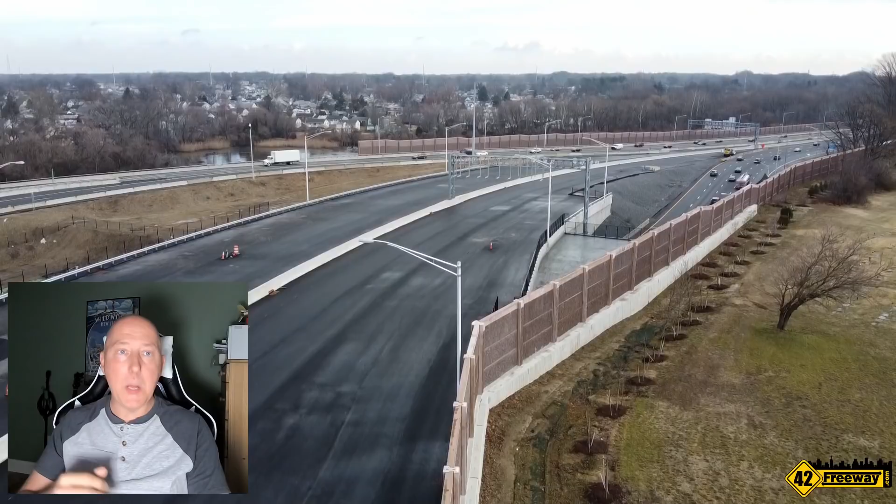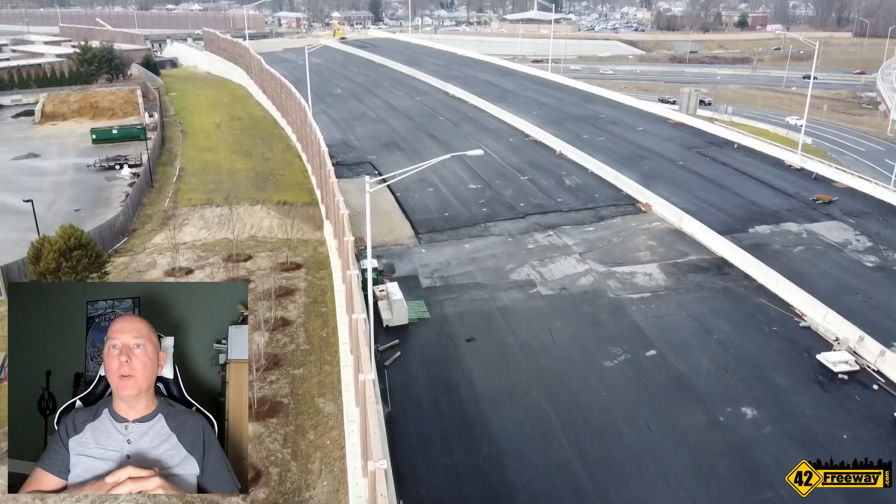So this was maybe a year ago. This is drone footage that was provided to me. This is what's on top of that embankment there, that roadway. So there's like 7 lanes of road this is going to be. I share this because it's deceptive to people. You don't realize when you're down on 42 or even looking from Browning Road how wide this is up there. That area right here where we stopped, that's pretty much where the collapse was. And you'll see that in the upcoming drone video.

Sorry for the jerkiness here. Again, this was provided to me. I'm like, hey, great, I will use it. So, you have more lanes on the inbound side because, as we've talked about in the past, there's actually 2 sources, 42 North and 295 North, merging in on the right side. The right side facing traffic, but our left side looking at it. Anyway, so this is what it looked like a year ago, maybe February 2020.

This is from Mike Kruce. Like Bruce, Mike Kruce Photography. This guy does real estate photography, drone photography.

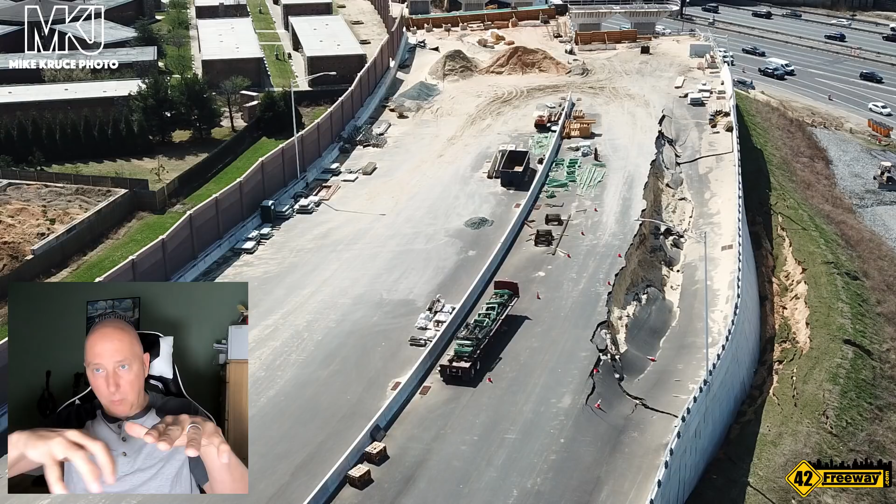So you can see right there on the right-hand side, obviously it's pretty clear, there is a big gash in the roadway. Actually, what's happened there is that right edge of the roadway has pulled away, depressed, pulled forward, and then you can see the dirt in the front. And we're gonna come back to these types of photos multiple times.

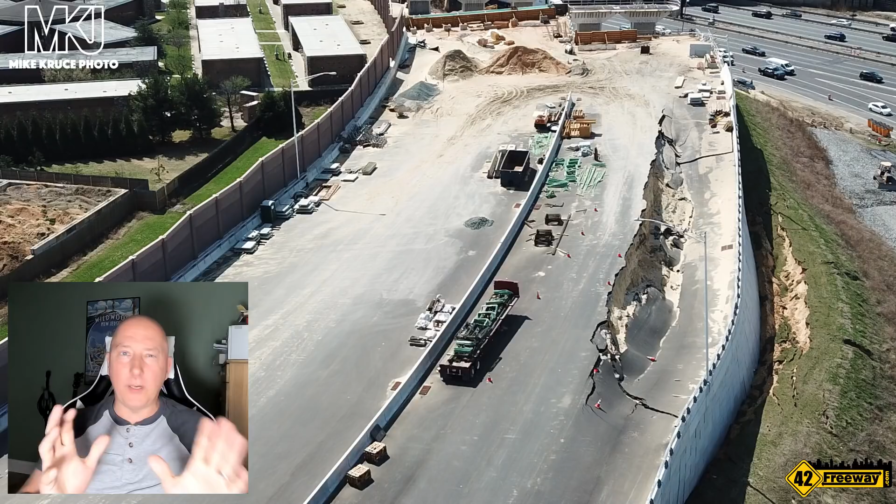There is a photo going around, by the way, on Facebook where it's pretty obvious to me it's someone from the engineering firms, construction firms, or New Jersey Department of Transportation right on that roadway. You can't get to that roadway unless you're part of the development crew, and it's a pretty powerful photo. I didn't want to use it in my video. There's fair use rules. I didn't want to embed it in the video. Maybe I'll slip it onto the webpage. I don't want to embed it in the video and then have someone come back to me and say, hey, I own that photo. There are some fair use rules for news organizations, but

So here's a close-up of that same shot. Now take a look to the left. I'm going to reference this tractor, actually, it's a trailer, right to the left a couple times, and there's another image where it's even more impactful, to kind of give you a scope of how big this gash is. And then again, look at that berm. I call it a berm. It's a pile of dirt pushed up on the right there.

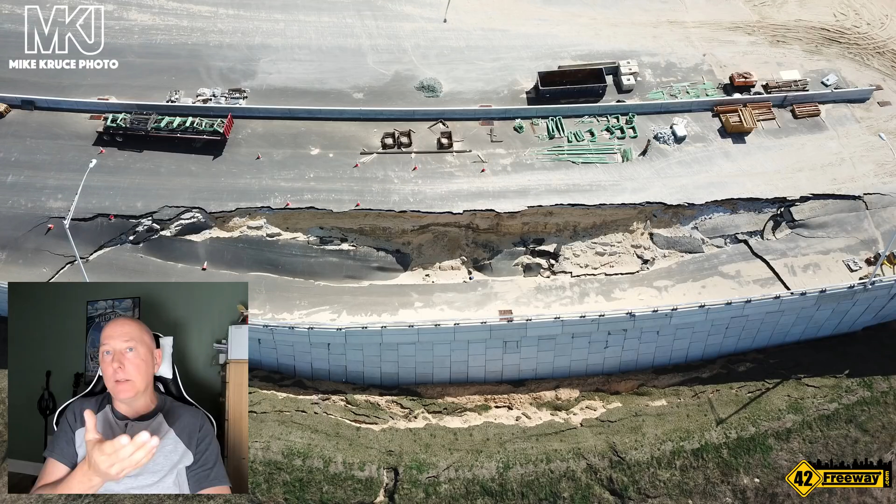We're going to go through quickly first some of Mike Kruce's photos. Here's another great shot, so you can see that tractor. That's the full size of a tractor trailer on the upper left there, right near his logo. And then look how large that gash is. I wanted to point out you can see how deep this is. From this other photo that I don't have in the video, this is probably 15 feet deep, the gash.

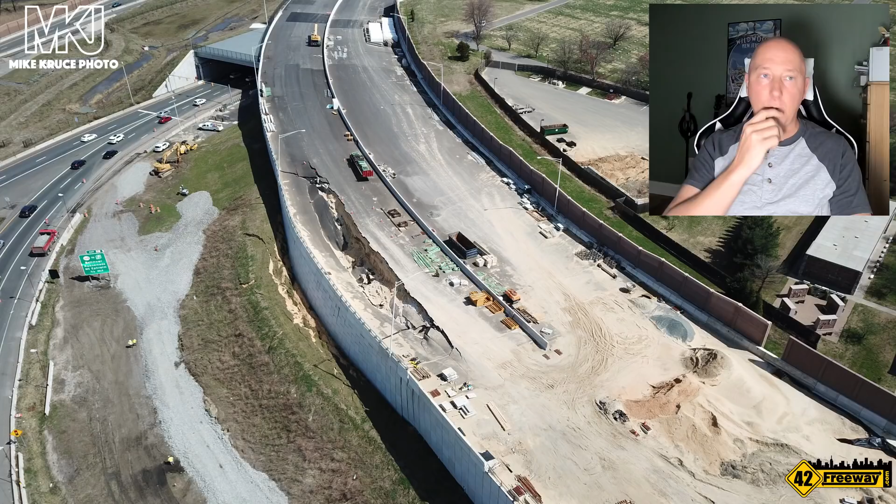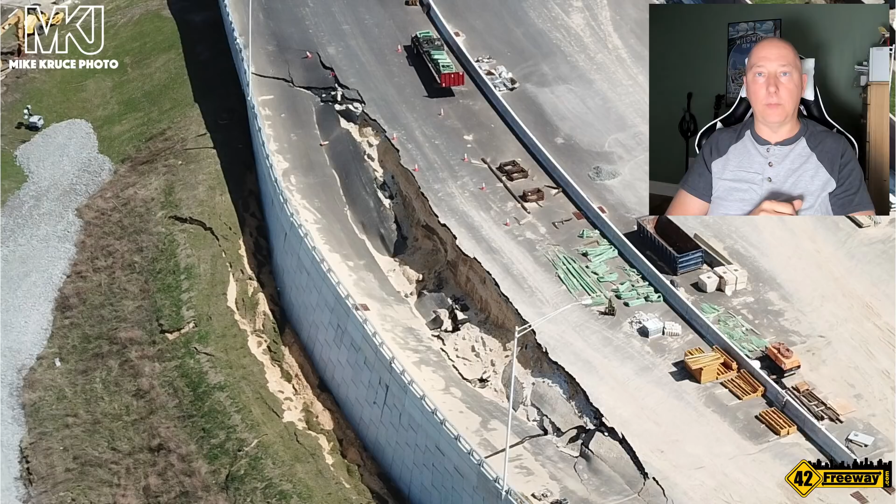You can get a sense here, and I should have pointed it out when I brought up the first photo, how the wall has pushed out. So you can see it here. Maybe we do a zoom in. That sort of bulge is not natural. This was a nice, smooth, consistent contour. So that bulges out. And again, there's that pile of dirt in the front. So that's going to be a key factor. I'm already giving you guys some clues here.

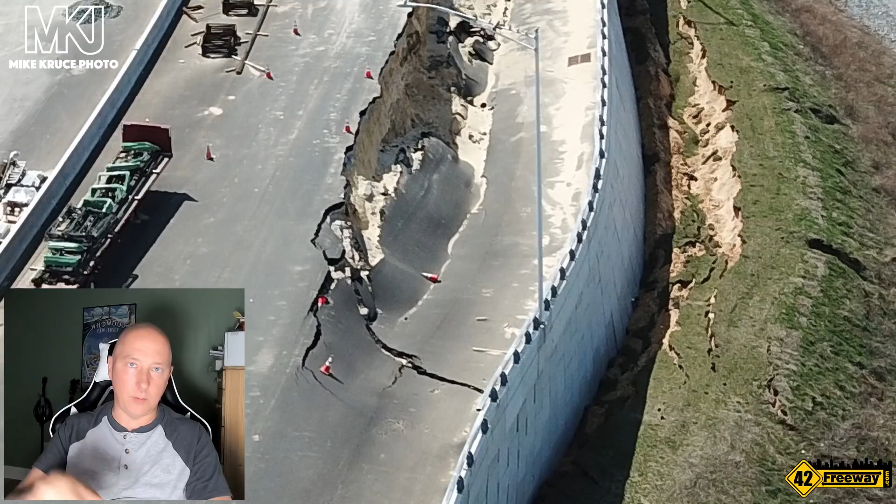So look what I did here. At the top, it just looks like it goes straight into the wall, but on the bottom, after the incident on Thursday, you can see how the dirt has definitely changed its style. It's like a wave, a wave ready to crash into the wall, a wave of dirt. And again, you can see that here, Mike Kruce's photo. So I'm really going out of my way here to point out this facet of the issue.

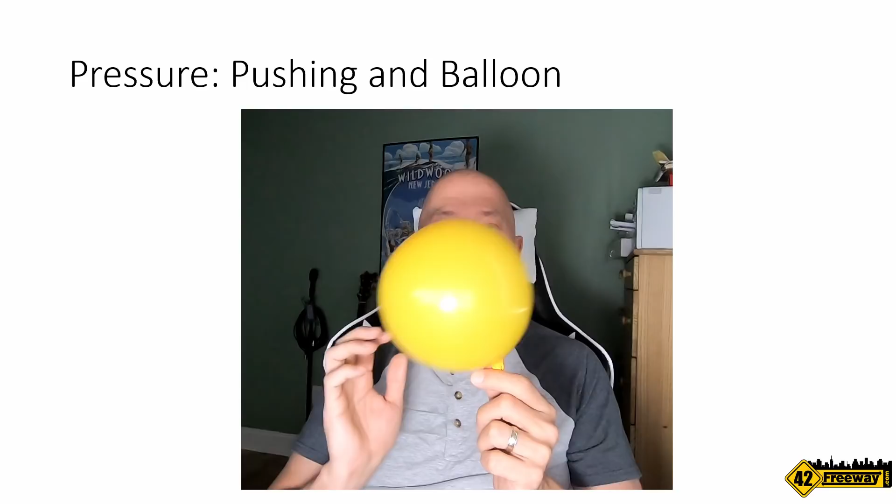So, pressure. What I think happened here, this is where we start getting into my theory, which I'm putting out on video. I'm pretty much going to stand by it, and if I'm wrong, I can't be that wrong. So here's my prop, balloon. If I have this balloon and I push it, that's pressure. I'm pushing the balloon, but there's nothing on the other side, right? So it's just going to move out of the way. No big deal. You're with your buddy at the bar, and he says something funny, and you push him, and if there's no one behind him, he'll step back.

But what happens if I do, oh, sorry about the camera, what happens if I do this? I'm pushing down. Now my other hand is there to put resistance there. Now what happens to the balloon? The balloon changes its shape, right? When I did this, it just kind of moved.

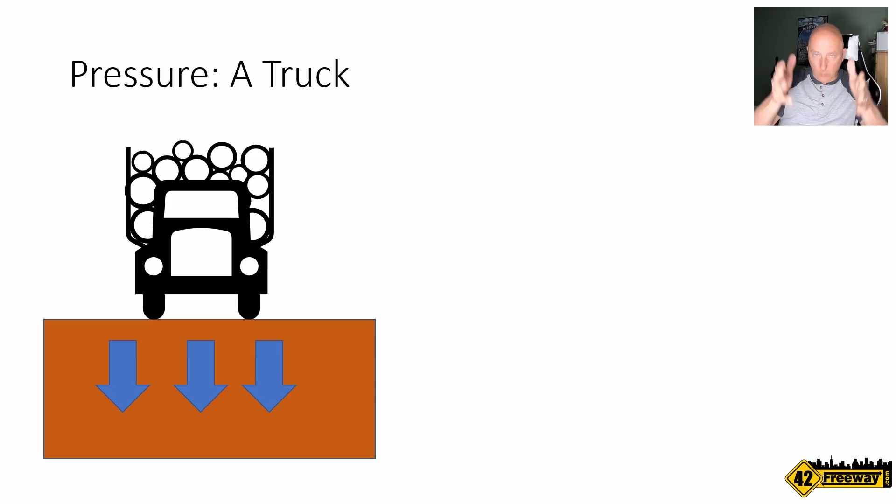Maybe there's a little indentation from the balloon, but it bounces right back. When I do this, the balloon changes its shape and it pushes out, right? So think about this with a truck. Look at me with these fancy graphics here. So we all know a truck's very heavy. Here's a truck loaded with logs and timbers. It's putting weight going straight down. Makes sense, right? The reality is, the pressure actually is going down and out.

That dirt, this is a physics thing, I guess, just wants to get out of the way wherever it can go. Now, with this scenario that I'm depicting here, I have the stop signs there because this is a flat piece of ground. The pressure wants to go down and out, but it can't, right? Because there's other dirt in the way. It blocks it.

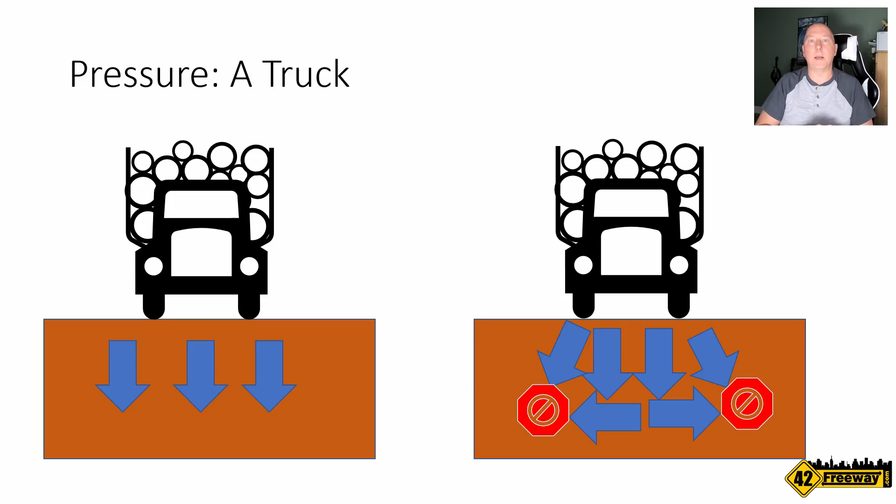Now think about this if you step in mud, right? You step in mud and you push down, and the dirt kind of goes out and around, and it comes back up, right? It's raining today; I should have gone out and got a photo of my foot in the mud. But you know what I'm saying? The mud comes up again.

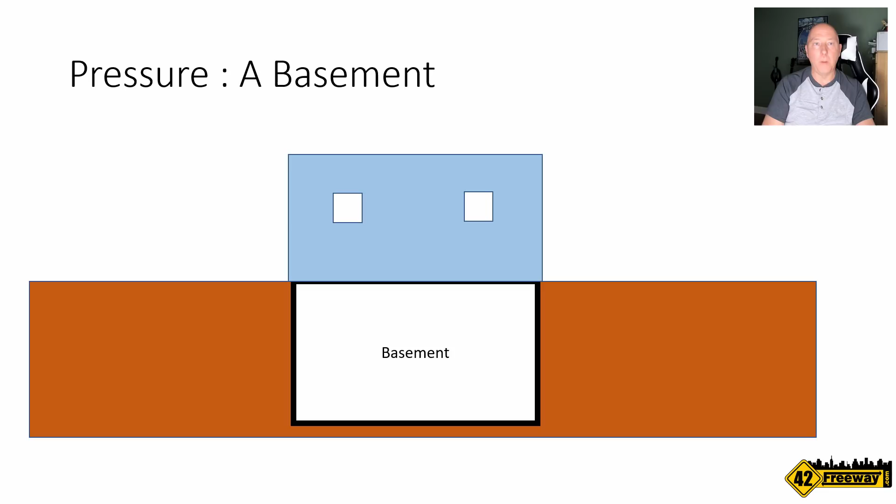Now, that takes us to another step. Here's a house with a basement. This actually happened to me. You've seen in National Lampoon's Christmas Vacation when Dad got his Christmas bonus and he was going to buy a swimming pool. Well, when I lived in Bellmawr about 20 years ago, we got a hot tub. So this was our house, this was our basement, and I went to get a permit for it. And I was told I needed to get an engineer's review of the hot tub because I wanted to put it up against the house.

We had a deck coming off the back of the house. We put the hot tub there. If you aren't aware of this, a gallon of water weighs 8 pounds. There's 400 or 500 gallons in a hot tub. So you're talking like 4,000 pounds of weight, not to mention the people. And you're right next to the basement.

So if we go back to my truck depiction, it's not only that the weight is going straight down into the ground, as depicted by the arrows, the weight's also going to want to go out. And the concern from the township at the time, and why I needed an engineer's report, is I had the wall of my basement right there. The concern was, would the weight of that hot tub push down, push out across, and blow out the wall of my basement?

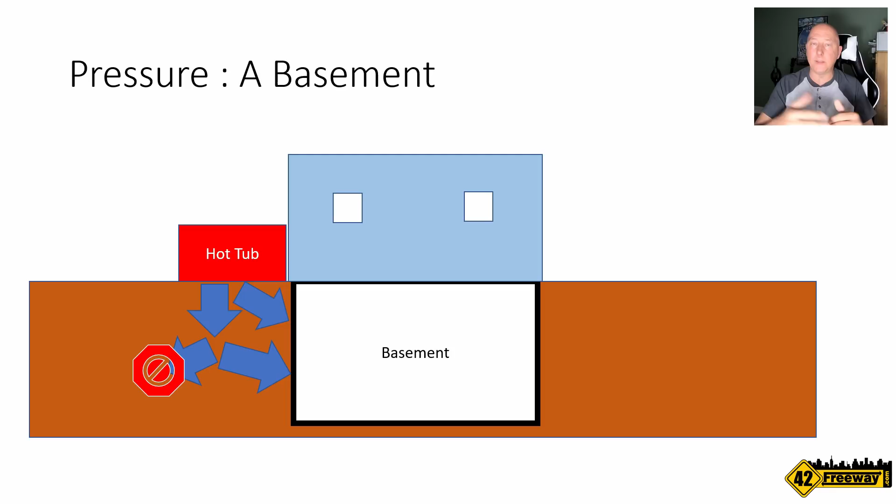So let's go back to my depiction of the Bellmawr Direct Connection project. So at first, as I said, you've got the road on top, and that gray thing depicts the wall that they put in. They have backfill there. I've seen some people online call out that it looks like sand. It does seem to be a lot of sand. Maybe it's a mix down below. I'm not even so sure the sand is a factor.

So as we talked about, it puts pressure going down. But the reality is, as we've just talked about, and I'm not a physics professor, that pressure wants to go down and out, down and out. Now the wall itself is strong enough to hold the fill in. I'm sorry, let me correct that. This isn't necessarily the Bellmawr depiction. This is just a standard depiction.

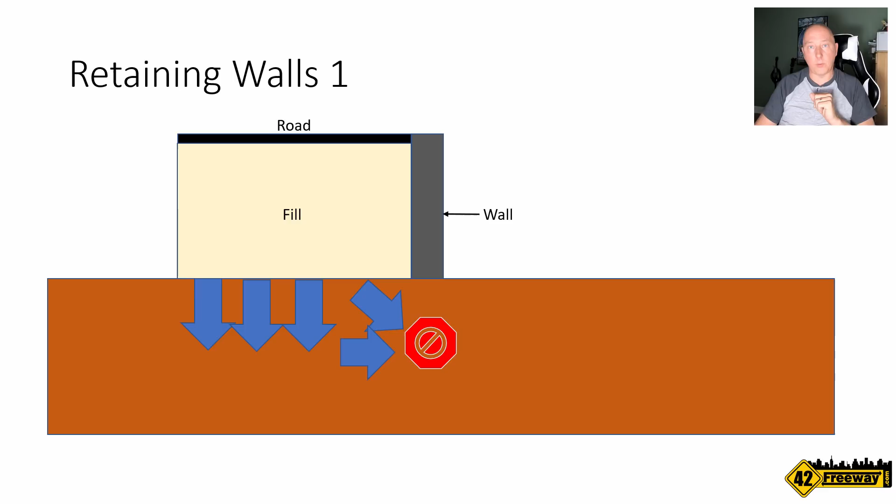If the ground is flat going across, like they have these same walls at the softball field at Bellmawr Park, there could be a concern there, but if the ground is flat, that pressure is kind of held up by all the dirt and earth around it. Here's what's different about the Bellmawr Direct Connection wall. Remember this picture? Look what they did.

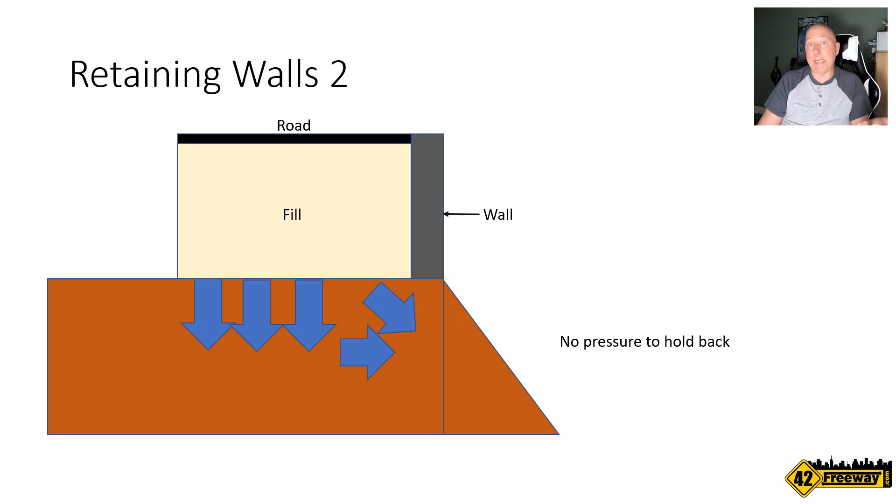And as we saw, there's no support columns going down to the bedrock. I don't believe there's any support columns coming off those barrier, the retaining wall. I don't know how far that goes down. But it doesn't matter. Basically, I think that the retaining wall did its job. It retained, it held up. So you get that pressure coming down and across, spreading out, like my balloon.

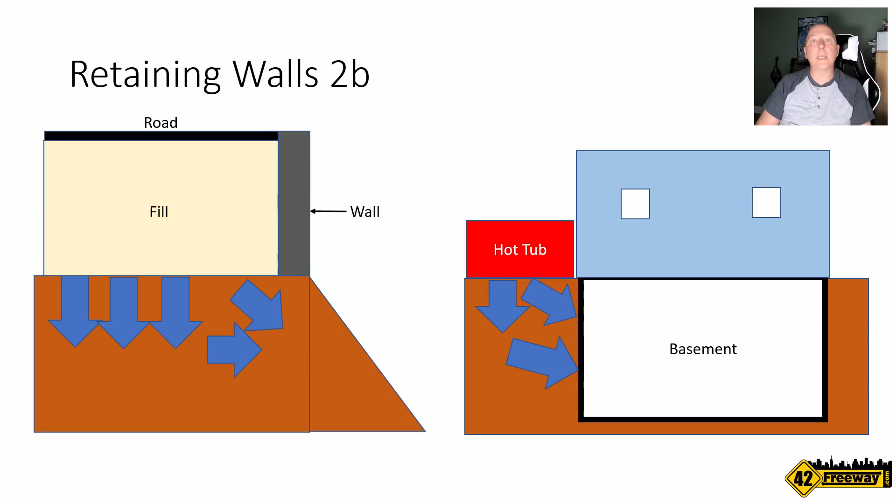And doesn't it sound very similar to my depiction of the house, right? With the hot tub and the town at the time being concerned that the weight of the hot tub would blow out my basement wall. I really feel it's the same problem that happened at the direct connection project. Now let's go back to this photo that I've shown maybe 3 times from Mike Kruce Photography. See what I'm saying here?

Weight on top, even though there were no cars, thank God there were no cars or traffic, this wasn't live, but you got the weight, you got the dirt, you have some rain, pushing down, and what I think happens here is, it's not that the wall itself necessarily gave out, but the footing and the dirt underneath it started pushing it.

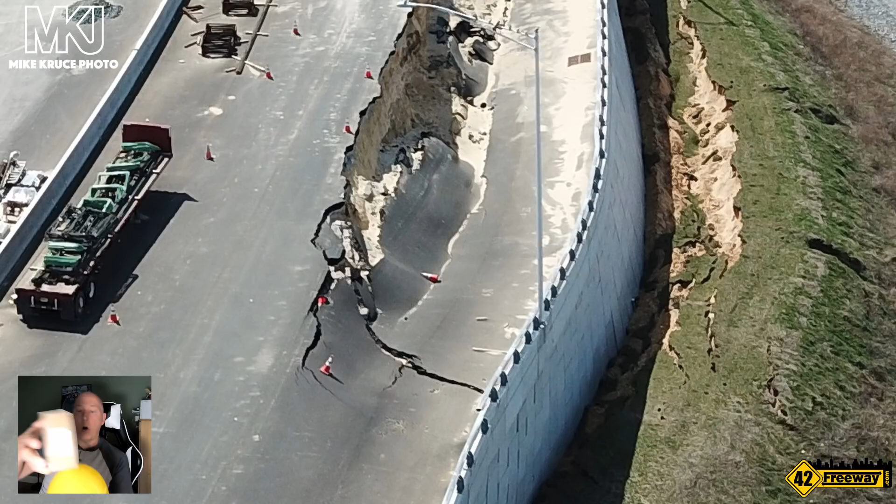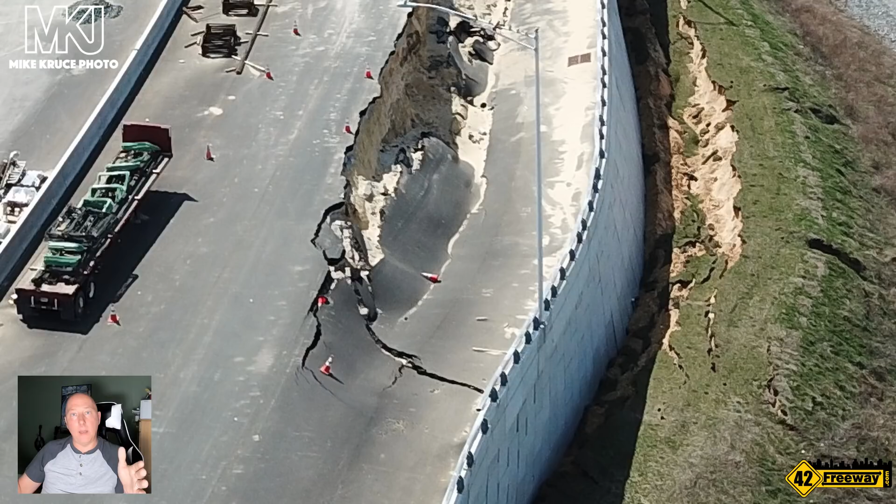Imagine, let me see what I got here. I got a box here. Say this is the wall. It's sitting on the dirt. The ground underneath it from the weight starts pushing out, and the wall kind of goes down on it. Out. So, I forgot where I'm at in my presentation here. So this is the final slide here.

So the point is, I believe these retaining wall structures are actually very solid. They're used all over the country, used all over New Jersey. They're used all over this project. They're very solid. They're nicely engineered. The thing is, though, they need to be developed. And I don't know who approved the foundation that they're on.

But what I feel is the way this project was developed, with the slope of the grade coming up to the wall, it enabled this so that the pressure could not be held back from all that dirt and all that fill. And it's a large amount of fill, right? This is 7 lanes across. No, is it 7? Maybe 6 lanes, but shoulders. It's a lot of fill. It's a lot of pressure.

And now notice, it didn't collapse on the other side. That's because on the other side, you have flat land up higher from the cemetery and the mausoleum that's there. So it didn't crash over there. It crashed on this side. This was the path of least resistance because there was no extended ground path. So that's my theory.